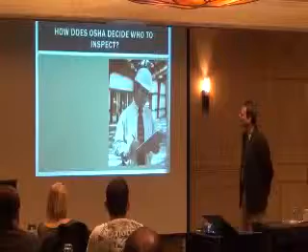So how does OSHA decide who to inspect? That's a question for you guys. How does OSHA decide to inspect your work site? What's their number one priority? You know, they're sitting in their office, they're like, what should we do today? I don't know, maybe we should do some inspections. Okay, well, how should we do that? Right? You just open the phone book.

Okay, worker complaints is certainly one way that OSHA decides to do inspections. It's not number one, but it is definitely high on their list in terms of importance. Injuries. So yeah, certain types of injuries OSHA might need to decide to inspect, and we'll talk a little bit about that. You didn't get number one yet, the most important thing. Okay, well they're inspecting for safety issues, right? So they're looking for problems and violations in their standards.

What gets them on their feet, coming out to your facility? A death. That's actually number two. So if you have a fatality at your workplace, that's their second most important thing to get out on. So what would be more important or more urgent than death? Previous citations. That can be definitely a factor, but it's not number one. Just the industry. History is a factor. What's that? Violence. That's a good one.

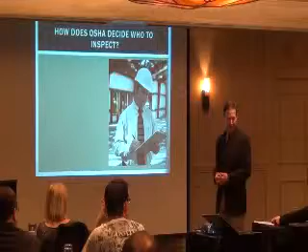Okay, so number one, I'll stop the suspense, is imminent danger. So what is imminent danger? Something that is an immediate hazard that could cause serious injury or death. So if somebody contacts the OSHA office, it could be an employee complaint, and says, hey, people are up 50 feet in the air, they're near the edge of the building, they don't have fall protection on, somebody's going to fall, OSHA's going to treat that seriously and they're going to go out on it, and that's going to be their number one priority. Get there before somebody dies.

Because when we go to number two, the fatality, people are kind of safe after that happens, right? Everybody's like, wow, we just had a very bad serious accident, we need to be safe. So that actually falls to number two. After that is employee complaints. So if employees contact OSHA, this has to be a signed complaint. So the employee signs it. It is anonymous, so the company does not know, and OSHA will not release the name of the employee if the employee wishes it to be kept in confidence. That gets to number three.

Beyond that are some of the other things that you had mentioned, and that deals with programmed inspections. So the agency creates a list of where should we go and who should we inspect based on high hazard industries. So if you happen to be in an industry that tends to have high incident rates, then you're probably going to see OSHA. Construction companies, for example, regularly get visits from OSHA. Barbershops, not so much. Okay, so they prioritize based on hazard.

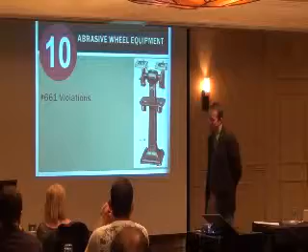So, I'm going to start with number 10 and build up to number 1. Right? So, number 10. Anybody want to take that? So, number 10 is abrasive wheel equipment. You have one of these? If you have a pedestal grinder, something that looks like this, I call these OSHA magnets. When an OSHA compliance officer comes into your facility and they see one of these, they just kind of get excited, because it's usually an easy citation for them.

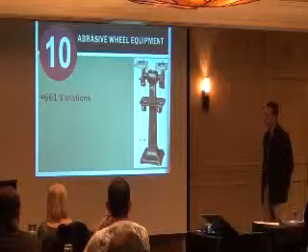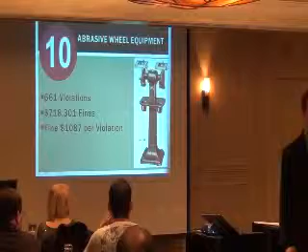There were 661 violations in the manufacturing sector that I looked at involving this particular device. In total, there were $718,000 in fines, and each fine was roughly about $1,087. Now, I do have to tell you something here. When I'm showing you the average fine, that's probably understated a little bit, because when OSHA issues citations, sometimes they issue citations without penalty. In other words, you get a citation and OSHA says, you've got to fix it, right? But they don't give you a dollar fine.

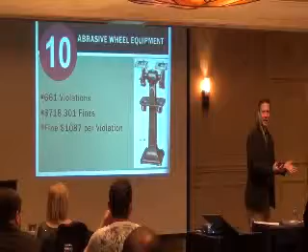So that gets diluted in here. So the $0 fines are also in here too. So some of these are going to be a little higher. Some of them might actually be no fine in some cases. And those are usually what are called other than serious violations. So what do we need to do with this thing to make sure we don't get cited?

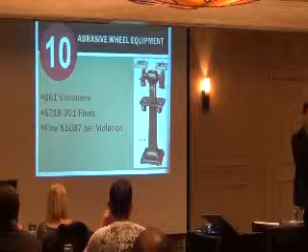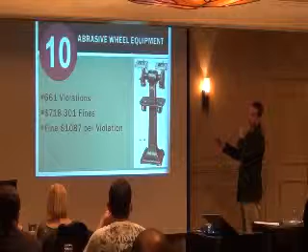Guards. Yeah, so we have some guards. And now actually these top guards, if they're there, they need to be in good shape and in good condition, but they aren't actually mandated by OSHA. So you don't have to have these, but if people are using the grinder, they need to wear what? Safety glasses and a face shield, right? Both. So you have the option of using these, or you can just go to the face shield and safety glasses combination. All right, so what else are we going to look for on this thing?

Yeah, exactly. So the big one is right here. Okay, the gap between the tool rest, it's called the tool rest or work rest, and the face of the wheel. That gap can be no larger than... got the good ear out, listening for it. What do you think? Well, how far apart is that? Oh, yeah. So it's 1/8 of an inch.

So the problem with this is what? People use the grinding wheel, it gets used up, it gets smaller. So you have to continually adjust the tool rest in as the wheel gets used up. So this becomes an activity that your maintenance department or other people that would be utilizing this type of thing need to pay attention to. The other piece is that this type of equipment needs to be anchored to the floor. This applies to other types of equipment like drill presses and anything else that you've got that stands up vertical. Okay? If it has holes in the bottom, it probably means it needs to have bolts in the bottom, anchoring it to the floor and securing it so it doesn't topple as you're using it. So take a look at that.

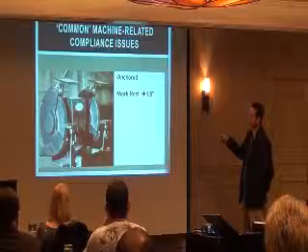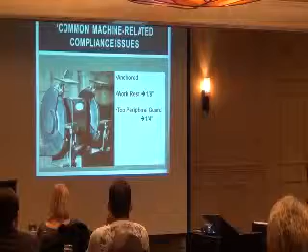There's also one other provision on here that gets cited a lot because people are generally aware of this requirement, but sometimes are not aware of this requirement. So there's a top peripheral tongue guard that actually comes down over top of the wheel, and that one also has to be adjusted within 1/4 inch of the wheel. So we have these two adjustments that have to be maintained on that wheel for use. Now, why do you think they have those? Why are they important? It's not just about citing you because these things aren't there. There's a reason for them, right? What do you think?

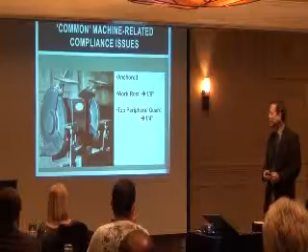Yeah, prevent injury. So what could happen if you didn't have the work rest adjusted properly? Yeah, you get the work twisted up and down inside there, your hands get down inside there. How about the top guard? Why is that there? Yeah, so that's reducing particle flow out, but also the other thing that's really critical for this type of equipment is if you have a failure of your grinding wheel.

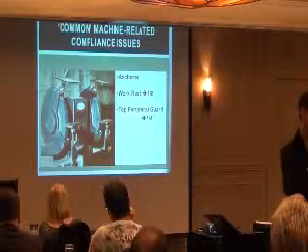So these things turn at anywhere from 4,000 to probably 10,000 RPM, 12,000 RPM. That's a lot of speed, and if you calculate the surface speed, it's roughly in between probably 100 and 200 miles per hour. So this thing's spinning at that speed. If it disintegrates or breaks, you now have lots and lots of small stones, in essence, sharp shrapnel that's coming out of it that very easily can cause death. So the importance of the face protection, the importance of this top peripheral guard is to prevent some of that material from flying out if in fact you have a failure of your disc.

The other thing that OSHA will check is whether you're doing a ring test. Okay? A ring test would be what? Who knows about ring testing?

Tap the wheel, make sure. Very good. Absolutely. It's a check for cracks. So what we do is suspend the wheel up, and we just hit it with a non-metallic object, such as the back of a screwdriver, and you should hear kind of ding, ding, ding, ding. And if it rings the whole way through, it's a good wheel. If it goes ding, ding, dunk, then you don't want to mount that one, and you want to get rid of it.

Okay. And there are situations where people have wheels that are not in good shape and mount them, and they blow apart. I saw a video of a company who actually had video of a wheel blowing up in their facility. But this was no little abrasive wheel. It was one of these ones that are about this wide, about that thick, that just blew. And luckily, the guy had just turned his back right before it blew up. Lots of force, lots of speed in that thing. It's huge. So ring testing is important.

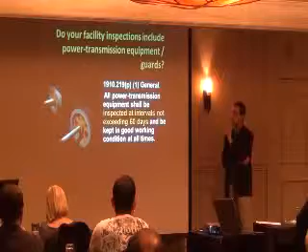The other piece to this is that OSHA requires inspections of power transmission equipment and guards. That's one I find missing a lot. Basically, power transmission equipment shall be inspected at intervals not exceeding 60 days, and it must be in good working condition at all times.

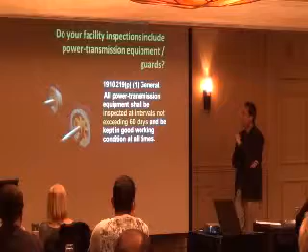OSHA does not mandate that this be a documented inspection. But again, if you don't have a document showing you've done it, it's kind of your word against theirs, so to speak. So this would be appropriate to document. Inspection shall be made of the belts, lacings, fasteners, and all this equipment needs to be kept in good repair.

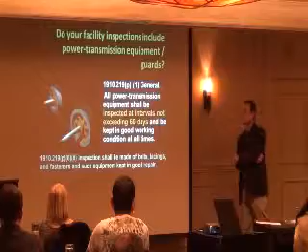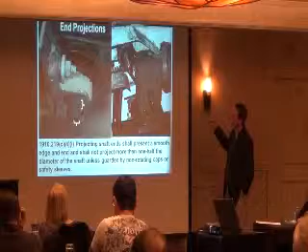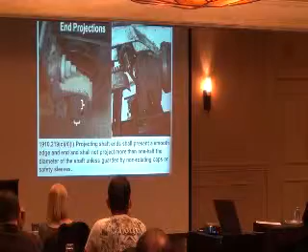Here are some examples of other types of power transmission related guarding issues that probably get cited pretty often. Here's an end projection—you might have this on a conveyor system or other equipment, where the end projection of the shaft sticks out. The most it's allowed to stick out is half the diameter of the shaft. So on this one, that's the half diameter—that's as far as it's allowed to stick out. If it sticks out more than that, you have to cover it; it must be guarded or protected. That's another one people have issues with, right here and here.

And I put the actual standard in here because I find humor in how OSHA writes things sometimes. I thought this was kind of funny—just listen to what it says here: 'Projecting shaft ends shall present a smooth edge and shall not project more than half the diameter of the shaft unless guarded by a non-rotating cap or safety sleeve.' You hear that? Smooth edge, and...

So that's power transmission. Number 7.

General electrical hazards. There were 1,214 violations with this, $1.7 million in fines for this topic, and roughly $1,400 per violation issued. Now keep in mind, violation dollars can go from $0 to $70,000 per violation, depending on how it's classed.

So, anything over 50 volts has to be guarded or protected. If you have a circuit that operates at 50 volts or greater, it has to be covered or protected. It cannot have open conductors. In addition, all the electrical safety work practice requirements kick in at 50 volts.

So these are the types of things we find in workplaces where there's covers missing, there's openings in the boxes or materials. You've got these knockouts that are typically found in panel boxes, typically found in outlets. They all have to be in place, otherwise you have exposed electric.

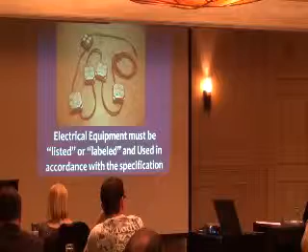Now, extension cords can actually be manufactured in-house. You can build your own extension cords, provided all the individual components are listed or labeled, and that you assemble them in accordance with their listed or labeled use. And the only reason that's allowed is because electric extension cords are considered temporary electric, which is allowed to be a class less than that of permanent electric. So you're allowed to build your own and not have the whole thing approved, but you have the individual parts approved. The problem is when people use these types of boxes—usually these boxes are designed for what?

Stationary mounting. They're designed for wall mounting or something like that. This is being used in an application it's not designed for, so it's a violation, and OSHA will cite that. Not to mention that typically, that's probably too many outlets.

We also find lots of issues with panels. So what are we looking for here? Labeling. Ideally they should be closed so they're not in use. Labeling—right, what controls what? So with power, we know exactly what controls power for the different areas. Yeah, so this should all be clearly labeled. Some of these I look at are in pencil, and they've been there so many years you can't even make it out anymore. I have a labeler that I used to label all mine in my house. You don't have to go that far, but it should be very clear as to what controls what.

What else do we need to have here? Sometimes we do this.

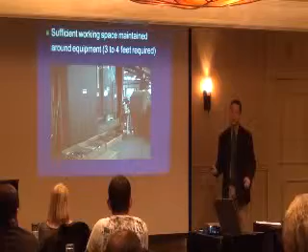And then the one we always have problems with is these panel boxes getting blocked. There's a requirement for 3 feet clearance in front of all boxes and panels for access, and in some cases, depending on the voltage, it's 4 feet. So how do you guys make sure people don't put stuff in front of a panel box? Put caution tape on the floor? Yeah, if you put caution tape right in front of the boxes so it shows exactly where to store things, you have to keep that area clear. That can be an issue, and why is that an issue?

You might need to access it in a hurry. So a quick story, I read a fatality not too long ago. This involved two guys doing work in a home, residential property, fixing an old garage door opener. This is the middle of summer, August. If you get up into the roof system of a building in the summer, what does it tend to be? Hot. This individual sets up an aluminum ladder, climbs up there, and is going to do a repair on this overhead garage door opener. Now he has a short sleeve shirt on, and he's sweating. We know when we sweat what happens to our bodies as it relates to electricity. It's much more conductive, our body's resistance drops by 500 times.

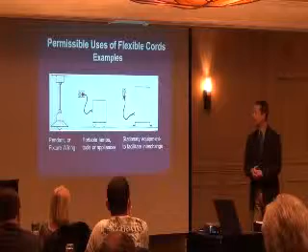Number one is pendant or fixture wiring. So you are allowed to drop a flex cord from the ceiling. Typically for lighting, you can do it where it's directly into the box. If you're dropping it for an outlet, you really should have a plug going into an outlet receptacle at the drop with the strain relief. Portable lamps, tools and appliances that are movable, you can use flex cord for that. And if you have stationary equipment that you need to move around occasionally in your facility, you are allowed to use flex cable for that, also to isolate vibration.

Other than these permitted uses, the only other permitted use is temporary as an extension cord. So there's a lot of times people use flexible cord when they should not be using that.

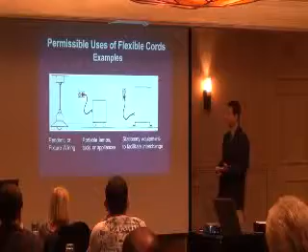Extension cords, again, shall not be stapled. They should not be fastened to the building surface. They cannot be hung from nails or suspended by wires. These are temporary applications. So what I find is somebody plugs something into the outlet, runs it up the side of the wall, puts a few wire ties to the conduit, puts it up over the drop ceiling, runs it over, puts it down and plugs in a clock. What do they have to do? Put permanent electric in. You need an outlet over there. Install one. Don't use flex cord.

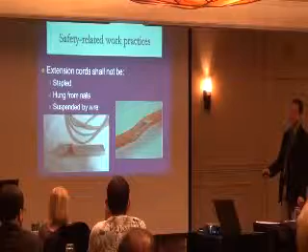This particular one I found at an institution of higher education that I went to school at. It's really surprising. And I said, that's not really good. And they were like, oh, okay, yeah, we probably should get rid of that. We should.

So flexible cord has to be rated and listed, again, for the application it's being used in. A lot of you think about the cords you have in your house, like a lamp cord that runs to your lamp, with two conductors, and it's flat. We call that zip cord sometimes. That cord is absolutely not appropriate for an industrial environment. So we have to make sure the kind of cord we're using is the proper type.

So what you want to look for are the letters on the cord. If it doesn't have any letters on it, then it's probably not a rated cord and you want to get rid of it, or it's an old cord and it wore off. But you want to look for the S or SJ. S is hard duty, SJ is junior hard duty. So those two cord types will be good for a heavy environment, either construction or manufacturing setting. If it's not of that type, you really probably shouldn't be using it.

Now there's lots of other letters that you'll see on a cord. I'll tell you a couple others that are important. You may see others beyond this. Another important one is the O. O stands for oil resistant. And if you have two O's, it's double oil resistant. So it means the outer insulation and the inner insulation is resistant to oil. So you might want to look for that if you're using it.

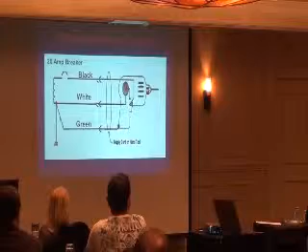So here I have a diagram of a basic electrical circuit. We have the black wire, which is your hot, your white wire, which is your neutral, and then your grounding electrode, which grounds the circuit in the event of a problem. Electricity is just the movement of electrons, right? They just jump from one atom to the next, and that's electricity. Some things make it very easy to get the electrons to move, and those are conductors, and then there are things that make it hard to get them to move, and those are insulators.

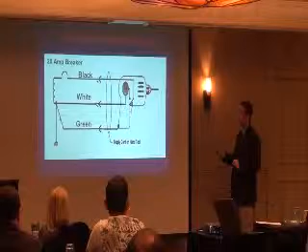So without getting into much discussion of alternating current versus direct current, these electrons are basically coming out of the hot wire, doing their job. They go through a load, do their job, and return back through the white wire, which is connected to ground.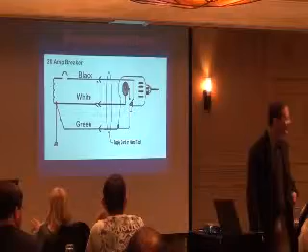So the way I like to think about this is ground is home. The electrons go to work, they do their job, and they go home. They like to go home. You guys like to go home at the end of the day? Yeah, depends what's going on at home, but yeah. Usually we like to go home at the end of the day. So they're always looking for an opportunity to go home.

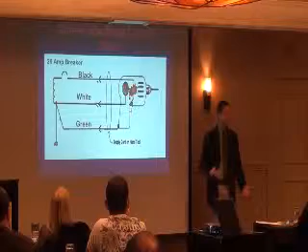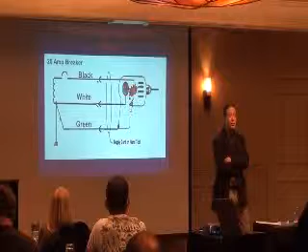Now, what can happen is we have a short. The hot wire comes off. It's now touching the case of the tool. So what happened basically is these electrons came to work and they couldn't do their job. The gate was shut, they couldn't get into the plant. If you go to work and the gate's closed and you can't get in, what are you going to do? You're going home, right? You're not going to just sit there and wait for 2 hours to see if they open up. You go home. Electrons want to go home. They can't go home this way that they normally would, because that's through the plant.

So what are they left with? They're looking for another opportunity. Well, look, this is connected to here. Hey, we can go home this way. We'll get home this way. The road's just as good. Look at that, we got home. Yay!

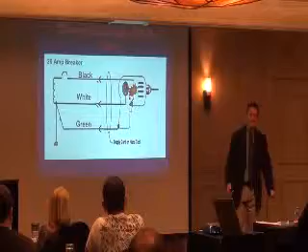Unless, of course, you decided that you needed one of these cheater plugs - you put one on and go down from 3 conductors to 2 conductors. Or maybe you just break off that third prong because you didn't need it, and you're plugging it into that chintzy extension cord that doesn't take a third prong, so you had to break it off to get it in there. You took away your safety. Does the tool still work if you break off the third prong? Absolutely. The only thing you did is take away your safety. So these, by the way, are illegal in the workplace. Grounds have to be continuous and permanent. You can't take it away.

Now there's this little wire that's on here, right? You're supposed to do what with that - hook it to the outlet, right? I've never seen that done. And the other question comes up: is that an effective ground? Is the outlet even grounded? Is it a connection problem? So even at home, you want to make sure that if you are going to use those, you connect that third piece. And better yet, put it on what we're going to talk about next, and that's the ground fault circuit interruption.

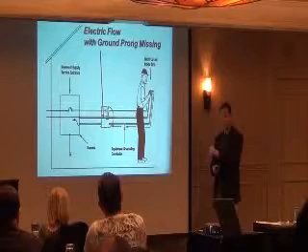So you're holding onto the tool. You broke off the third prong. You got one of those cheaters in. The electrons want to go home. You took away the extra road. So what road are they going to take? This is the only road they've got to go home. Now it's a bumpy road, it's not a very fast road, it's tough to get down through sometimes, but hey, it'll work - we'll get there. And then if you're holding onto the tool, you're getting shocked.

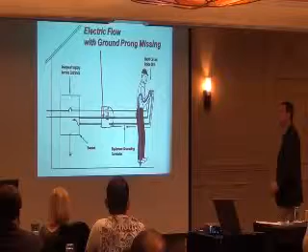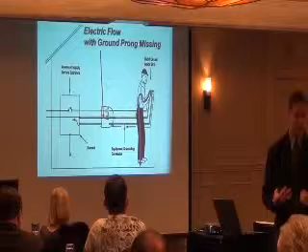So OSHA requires that there be grounds on hand tools, that there be grounding conductors on your extension cords and so forth. These are just another piece that people get cited for - poor grounding situations.

Also, GFCIs. Now, most of you are familiar with these, I'm sure. GFCIs, ground fault circuit interrupters, are wonderful devices that help protect us from electrical shock. And of course, you see these where? On computers, stuff like that? You might see them on computers. They don't really need to be on computers.

Your kitchen, yeah. That's where I have them. Yeah, you've got them in your kitchen. You've got them in your garage, maybe. All your outside outlets should have these types of outlets on. So GFCI is anywhere there's water present or has the potential to be present, you should have GFCI in place. So that can be a violation.

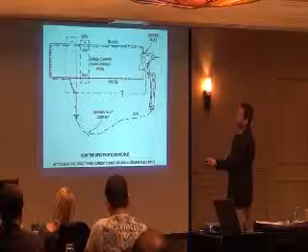How these things work is really cool. And they're really great. So here I have the hot wire, and then I have the white wire, right? So here the electrons are coming out. They do their job, and then they're supposed to go home. Now, the way I like to think about a GFCI, is it's kind of like a parent, right,

of like teenage kids. So my daughter's 23, I think, 22. I have a son that's 20 and another son that's 18 or something like that. When the birthdays come around, I've got to figure that out. But

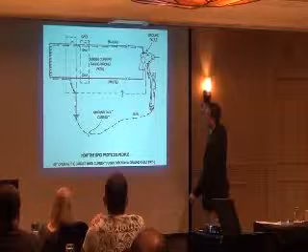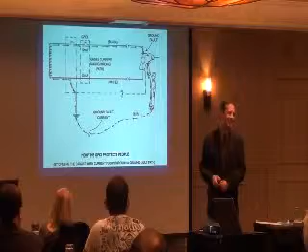so the parent sits here, right, and he watches, and the kids go out and they do stuff. I don't know what they do, right? And then they're supposed to come home. So when they leave, you say, why don't you try to be home before 1 o'clock in the morning, okay? And then you watch, right? And if they don't come home when they were supposed to, what do you do? Search for them. Well, it depends. If it's the daughter, yeah, you search for them. If it's the boys, you lock the door and go to bed.

But when they finally do get home, what do you say? You say, you're grounded, right? You're not going out anymore. And that's exactly what a GFCI does. If the GFCI finds out that it can't account for the electricity it's sending out, it's not getting all that electricity back, it opens the circuit. It stops sending electrons. It does that in a 40th of a second, protecting the individual from shock. So these are wonderful devices.

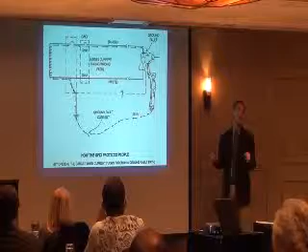What it does is it looks for a loss of what's called 5 milliamps of current. So that's 5/1000ths of an amp, which is not very much, but it's enough to cause us to feel a tingle, a shock. So it interrupts the flow of the circuit before the point where it becomes dangerous.

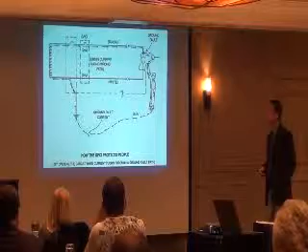So, where else does OSHA require these besides water areas? These are required on all temporary cords, extension cords, used in maintenance and construction applications. So if your maintenance department is running around with extension cords, they better be plugging them into a GFCI outlet. Or using one of these little things, right? It has the GFCI built in, I can plug it in here, I plug my extension cord in here, and now my extension cord is protected. Okay?

So, we're halfway through the top 10. So that might be a good time to take a little stretch if you guys want, get some food and coffee or what have you. I'll continue up to number 1. We've got 5 to go.

What do you think's out there yet? What did we talk about that's probably a big citation? Flammables. Yeah, maybe. Machine guarding? Yeah, I kind of alluded to that. That's coming. Lockout, tagout. That's going to be in there. What else? Forklifts might be in there. HAZCOM. Yeah, okay. You guys already knew what they were. You didn't have to come.

And surprisingly, this list doesn't change a whole lot. You know, I've done the top 10 for the past 20 years. It's kind of the same thing. They change positions a little bit. You'd think we'd be able to get this stuff right after a while, right?

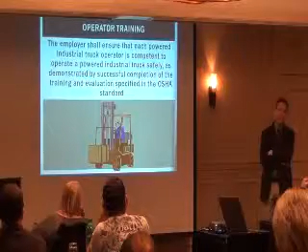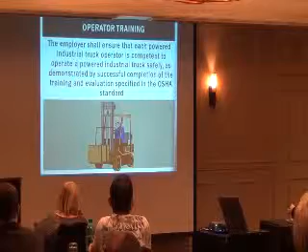So what's required? Obviously operator training. I think most people are familiar with what's required from an operations perspective as far as training goes. You essentially need to make sure that each operator is competent to operate the powered industrial truck safely, as demonstrated by successful completion of training and evaluation specified in the regulation. So just to highlight a couple things.

Number one, anybody under the age of 18 is not permitted to operate a powered industrial truck. I just ran into that recently. I won't give you the details of that, but anyhow, I want to make sure that people are old enough to actually run them. You may even think about creating a higher age limit than 18. I'd probably be in support of that.

So what does training consist of? You must do three things in your training. You must cover a classroom session. This could be lots of different ways. You could use a video, you could use online materials, you could do PowerPoint, however you want to do it. There are very specific topics that have to be covered in your classroom session. It has to include equipment-specific topics.

Okay, so what specifically on the equipment, you know, the details of how that equipment operates and works. How much horsepower do they have? Yeah, so what's the capacity of the particular equipment they're going to be using? How do they determine that? How do they determine the load weights of the items they're going to be picking up? All that becomes very important.

Workplace-specific topics. So your training has to include things that are specific to your workplace. So we have this ramp out here. It's more than a 10% ramp. You have to actually back up it when you're empty and go up it forward when you're loaded. We have low overhead clearance over here, and our triple mast lift will not go under there when it's elevated. You have to give them specific details about your work environment and things that they need to be aware of.

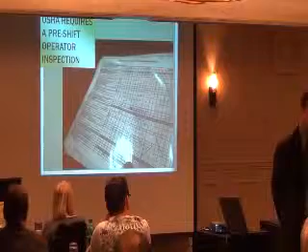Unsecured loads falling off of the forks. And then the thing that we like to use these for, elevating personnel as an elevator. OSHA does require a pre-shift inspection. So each shift there should be an inspection done. Technically, the reg doesn't say this has to be documented. However, once again, if you don't have the document, then it's going to be between you and OSHA to decide whether the inspection's actually been done. So I would encourage you to have some sort of written document for this.

But it doesn't specifically say that. If there's a deficiency, it has to be taken out of service. That's a huge one. If you have 3 shifts, they have to check before each shift? Correct.

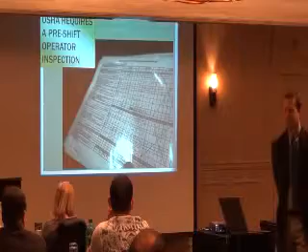I have another question about that. We have some vendors sometimes that come to the back door to bring some things, and they'll just grab a forklift and unload. Now, if they were trained, do they have to be trained specifically on our forklifts? Yeah, so OSHA has a letter of interpretation on that. Basically, there is an obligation by the host to make sure that those individuals are trained on the equipment that they're going to be using. So if, for example, they are trained as a forklift operator on sit-down equipment, that might be adequate for what they're doing. But you have to assess what their training is and determine whether it's appropriate for your work environment.

The other piece to that, and I know it's a very practical thing to do, is the liability, which is a whole other question. So if they end up getting hurt using your forklift, there's some potential issues there for liability. So you may want to have your insurance broker work with you to come up with some sort of release, a contractual risk transfer to transfer the risk to the other party to the extent possible in your contract documents.

So this is just an example of an obstructed load. This is actually a picture from a fatal case where an individual was standing in front of this, and the forklift operator basically ran her over and was not able to see her because of the height of the material here, and actually dragged her for some distance before he realized what had happened.

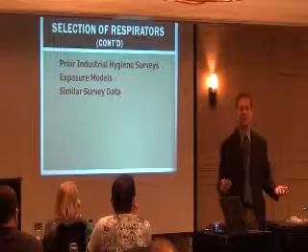That little exercise usually is as expensive, and sometimes more expensive, than just actually putting a pump on somebody and measuring it. And it's oftentimes not as accurate. So we usually don't use exposure modeling unless there's no other way to do it, or it's a very simple scenario where we just want to get a max of what it could be.

You may also use similar survey data. This could be from other companies or other applications where somebody has done studies and determined what the exposures are, and they're relatively comparable to your situation, so you can say we're probably within these ranges of the exposure assessments done in other applications.

So you really should have some sort of documentation of what people are exposed to when they're wearing respirators. If you do not, OSHA says you have to assume it's IDLH. IDLH - what's that? Immediately dangerous to life or health. So you have to assume it's worst case scenario, basically, which automatically puts you into air supplied respirator.

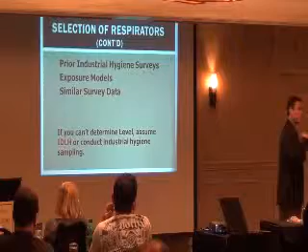So now you've got the hose line coming into your respirator, and you have to have an escape bottle in case the airline hose gets cut off, so you can open your escape bottle and get out. So if you assume that, you're into some pretty heavy stuff.

So what do we do? Respirator approvals are done by NIOSH, the National Institute for Occupational Safety and Health. Only approved respirators are permitted to be used. A lot of people use these particulate respirators for dusty environments, something like that. There's 9 different classifications of these, which I have listed here. You'll notice there's P's, R's, N's, and then there's 95s, 99s, and 100s.

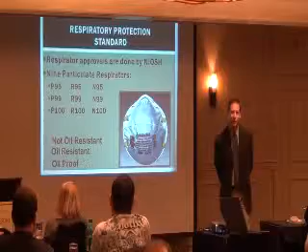The number refers to the efficiency of the respirator in filtering out particulates of a particular size. The letters refer to whether the respirator is oil-proof, oil-resistant, or not oil-resistant. So if you're using a respirator for a grinding operation where there's also cutting oils present, and I want to be protected to the very best level I can using this type of respirator, which one would I select?

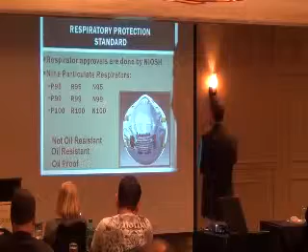These are the 9 choices you have. So I'm using a grinder, I'm generating particulate, I have an oil mist in the area from other operations, and I want to be protected to the highest possible level that I can.

P100 has to be oil proof, and at 100%, it's actually 99.97% efficiency of filtration. A 95 to 100 is not a lot of difference in terms of efficiency, so if you're using a 95 or 100, you can probably get away with a 95. But I tend to like to be better protected, so I tend to use the higher ones.

Your cartridge respirator, again, cannot be used in oxygen-deficient environments because you're filtering the air. These have what's called a protection factor of 10. What that means is I can be exposed to 10 times the limit, the occupational exposure limit. So that PEL we mentioned earlier, you could be exposed to 10 times that using this respirator. It's pretty protective. This one is also, believe it or not, rated for 10, so it also gives you 10 times protection.

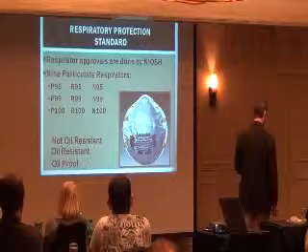This one gives you the opportunity to put different cartridges in it. This one only protects from dust and particulate. This can protect from dust and particulate, but it can also protect from organic vapors, acid gases, ammonia, whatever you have, by putting the proper cartridge in. Cartridges are color-coded to select the proper one.

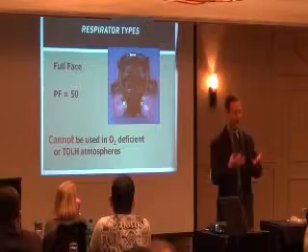Full face mask. This has a protection factor of 50, so I can protect myself up to 50 times the exposure. This is nice to use if the particular contaminant is water soluble, in that if you get this chemical or vapor into your eyes, it's going to cause irritation in the respiratory tract and your eyes because it reacts with the mucous membrane. Where you have that kind of exposure, using a full face is a better option.

So by looking at the colors here, I can tell this is a particulate filter. This is a HEPA filter, high efficiency particulate. And the black part is an organic vapor, a solvent type filter. You can actually, on some of these, stack them up and have a combination of colors.

Now, one of the things before you slap one of these on your face is you need to make sure that your body's going to be able to handle that. So when I put a negative pressure respirator on, what am I doing? I have to suck through that filter media, so it's putting a strain on my respiratory system. When I blow out the carbon dioxide I'm exhaling, some of that resides in the face piece of the mask, so when I re-inhale, I'm getting not as much oxygen. Because of that, OSHA says if you're going to have people wearing tight-fitting respirators, you need to have them medically cleared to do that.

So you have to do that prior to use and prior to what's called fit testing, which we'll talk about next. There's a questionnaire in the regulation, which is 1910.134, in Appendix C. There are 8 or 9 mandatory questions that you fill out. That gets sent directly to the healthcare provider. The employer should not be involved in collecting them.

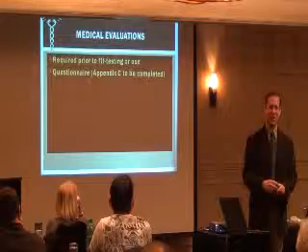They were supposed to be sent privately to the healthcare provider. The healthcare provider reviews them, and many healthcare providers will say, you don't have heart disease, you don't have respiratory problems, you're good to go — you can wear that negative pressure half mask. If I check that I'm a smoker, I have COPD, I'm claustrophobic, and so forth, doctors might say, hey, we probably should bring you in and do an actual physical and some pulmonary function testing, and see where your lung capacity is at before we give you permission to wear a respirator. So that has to be in place.

And these have to be provided during normal working hours, so they're convenient for the employee.

Thank goodness we don't have to do that anymore. Today we use one of 2 methods. One is a qualitative fit test. This is where the person puts their respirator on. There are 3 or 4 different ways to do this.

So there are other things we can use, like Bitrex and saccharin, but in that case you have to put a hood on top.

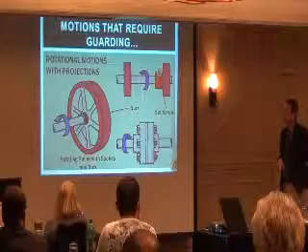So this is the interaction between the human and the machine, and there are lots of different motions that have to be guarded or protected. Look for these things in your facility: rotating pulleys, belts, things like that—we talked about power transmission, so that kind of gets covered—any in-running nip points, rotational motions.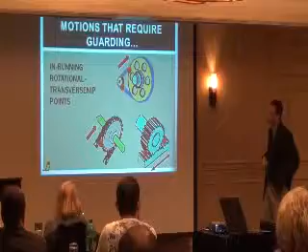Stationary and fixed nip points, so we talked about the pedestal grinder. Transverse reciprocating motions that are moving back and forth, where somebody could be struck by the moving table, like in a milling machine. And then the points of operation are really what this violation is getting at—the points on a piece of equipment where the action happens.

That has to be guarded or protected. So think about all the different types of machines you have in your facility, where the action happens, and how is that guarded. That's what OSHA is looking for here—things like punching, shearing, and bending, and so forth.

OSHA does have a national emphasis program. Remember, I talked about emphasis programs—they have a national emphasis program on prevention of amputations, which came out in 2006 and has been maintained. So what that means is they're specifically looking for businesses that have the types of equipment that could cause amputations, and they're going out and inspecting those businesses. There's a whole big process in terms of how you get on that list.

Labeling things like this, where there's a hazard present, is not considered protected. What this does is it shows the OSHA compliance officer where to write the citation. So you better—you want to provide warning to people, but you need to really protect them.

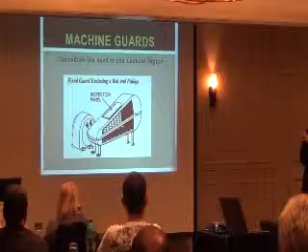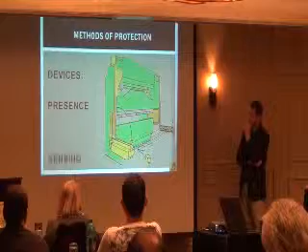So, machine guarding. Again, we have fixed guards, we can have movable guards, things like that, but any types of these things have to be protected. There's also methods of protection using other devices. We can use presence sensing, like a light curtain or something that interrupts the machine motion or action to protect people. This is an electromechanical device.

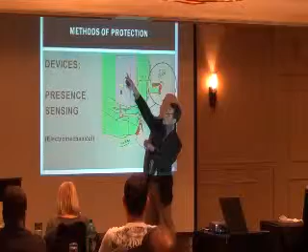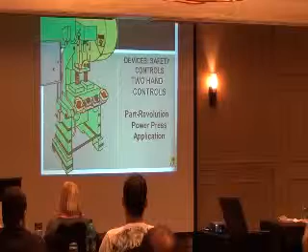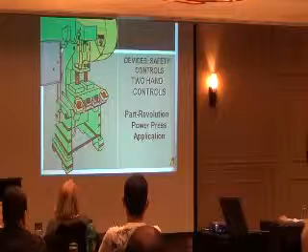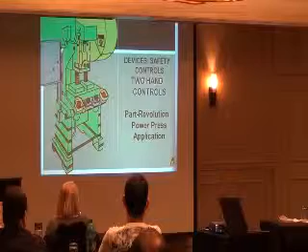We also have machinery that can be protected with two-hand controls or two-hand trips. Two-hand control means I've got to have both my hands on the buttons for the machine to do its job, so therefore I can't have my hands in the machine. A two-hand trip is one in which you press the buttons and then can come off of them, and the machine will run through its whole cycle with no stopping. A two-hand control, as soon as you come off, it stops. The importance on a two-hand trip is the distance that the trip is from the machine action, so I trigger the machine and have to be far enough away that I can't reach in and have my fingers cut off after I hit the trip. There's actually a calculation for doing that.

Of course, with any two-hand controls, it's a one-person job.

So here we have some adjustments being made, and I'll push this button, you push that button, and then we'll both cut our other hand off. Two people is too bad. And I see that in a lot of maintenance applications as well. You got two maintenance people working together, and one guy's like, okay, hit that control now. Oh, not that one! A lot of problems with that.

All right, number two. Yeah, you know what this is. You only got two left, the two biggies. They're always in the top 10, usually in the top 3: hazard communication.

So you guys all know probably that we changed HAZCOM, right? 2012 was changed, and the idea was to roll all the different world approaches together. Everybody had their own way to do labeling and chemical identification and things like that. So we said everybody's going to get together. The United Nations came up with an approach in the purple book that explains how we're going to approach chemical labeling in the world. Then all the countries are supposed to agree to do it that way, and some have and some haven't. The United States has done a little bit, but OSHA is really the first agency, other than DOT, to get on board.

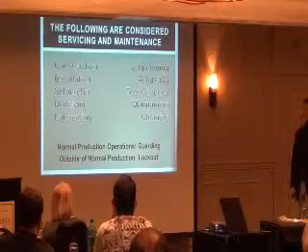I did one up in Scranton where I looked at their huge extrusion press. And I was there for 2 days just figuring out the press, and it took me about another 6 days to figure out, for all the things they do on that press, which ones had to be lockout, which ones could be done other ways. And lockout was a big deal for that press because it took them over an hour to lock it out, because there were so many different points to take that thing down.

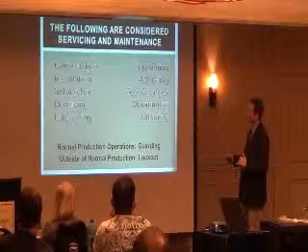So we have to consider construction, installation, setup, modifying, lubricating, unjamming, adjusting, tool changes, maintaining, cleaning the equipment. And these are all servicing and maintenance. If they are occurring during normal production operations, then generally you're going to protect these people by guarding them. If it's outside normal production, you're probably looking at lockout. So kind of bottom line is, somebody gets hurt on a machine, you probably violated the machine guarding standard or lockout tagout standard.

So I made a little flow chart. This really was to help me more than anybody understand what we need to do and when we need to do it. So if you start at the top, we have to do a service or maintenance activity. Is it during normal production? No. Okay, well, let's lock it. Is it during normal production? Yes. Okay. Do I have to take a guard or device off or place part of my body into the danger zone? Yeah.

Okay. So is it a minor servicing activity, which is routine, repetitive, and integral to the use of the equipment? If it isn't, I have to do lockout tagout. If it is, is there a safe method that provides equally effective means of protection as lockout tagout? If so, I can use that method. If not, I have to lock it. Continuing down here, if you don't have to remove a guard or safety device, then you can just go ahead and do it because you're not exposed.

So those are kind of the bends, but you can see that there's a lot of ways to get up to here and not too many ways to get to here. So when I have companies using alternative safe measures to protect employees doing normal production operation activities, it's a little concerning because you're down pretty many paths before you get there. I wish I could argue any one of those terms.

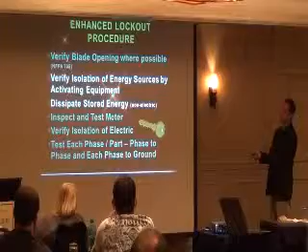And when I say you need to, not all of these are OSHA requirements. So here I have NFPA 70E, which is an electrical protection standard. It's a voluntary standard. So this is not really OSHA mandated, but it's a practice that's recommended. So those last few steps here are all electrical based. So you have a copy of that.

Your devices have to be standardized for lockout tagout. It doesn't mean they all have to be the same color, but they have to be identifiable as kind of the same type of lock in some format. Use a training, lockout tagout training video. Kind of the same thing with forklifts.

Interactive computer programs, OSHA says, are okay, but they're supplemental. They can't be used alone because you're not going to get to the level of detail that they require. The other thing I see people doing is we train everybody on lockout tagout. Train the whole plant. Well, that's okay. Train everybody on lockout tagout as an affected employee, but not as an authorized employee.

If you are training everybody and not specifying whether they're authorized or affected, you're creating a huge, huge problem. Be very clear about who's authorized and who's affected. And if you are authorized to lock something out, what is it you're allowed to lock out? Okay, I'm the saw operator, I'm allowed to lock out my saw, that's all I can do.

Okay, very simple. Or, I'm the maintenance person, and I can lock out all these different types of equipment. But maybe I can't lock out the saw. Be specific about what I'm allowed to do. Okay? The reason for that is you have to do auditing. Every person has to be audited doing a lockout tagout on every piece of equipment they're authorized to lock out.

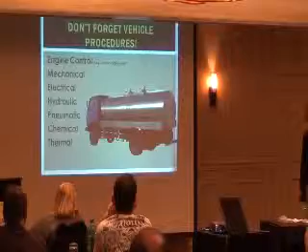Compliance. Don't forget your vehicles. If you have vehicles in your facility, they have to have a lockout tagout procedure for the vehicle. Industrial truck, whatever it might be. People might need to work on that, do service on it. If they do, you have to have a procedure.

All right, very last thing, just the fine amounts. So that was by order of most citations issued. How about in dollars? Total dollars, lockout tagout, still number one. Machine guarding. Number two, process safety management, which didn't show up at all. These are big fine dollars. Process safety management, most of you probably don't have to do.

If you have over 10,000 pounds of flammable liquids on your property that you use for your processes, not for heating, not for fuel, then you're under PSM. If you have certain chemicals that are particularly hazardous, over certain quantities, in some cases over 100 pounds in your facility, then you can be regulated by PSM. PSM basically is a crazy regulation. I'm working with a company right now that has to comply with this and got cited $40,000 because they didn't comply with it. So this is number one in expense for fines.

And keep in mind, while it's only $4,183 per violation, many companies get 10 or 15 of these for the PSM violations. So there are different citations within that section. So if you are covered by that, you've got to really make sure you've got that down. Most of you are probably not. On dollars, number 4 was powered industrial trucks. And then I'll just kind of zip through the last ones here.